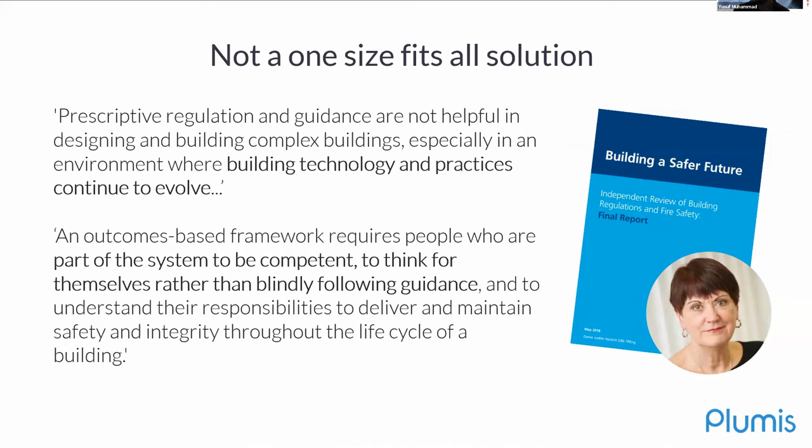She said that an outcome-based framework requires people to be competent and not follow guidance blindly, but think for themselves to maintain and deliver safe buildings throughout their life cycle. This is something that we at Plumis have really been trying to think about: how can we evolve the solutions to keep up to date with the way in which things are changing all the time?

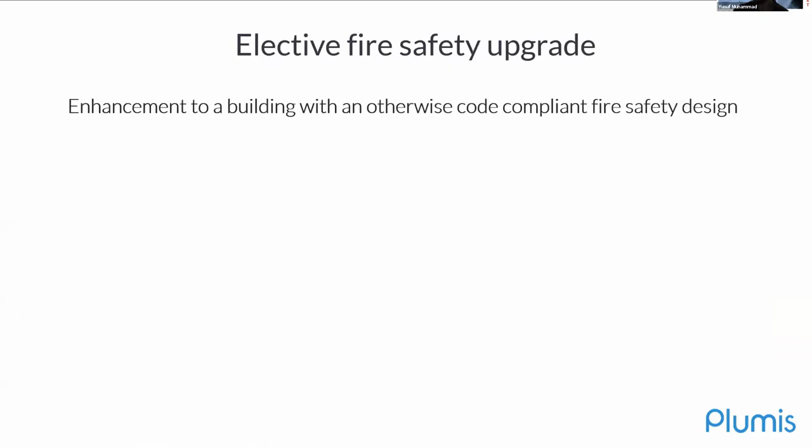So the very first thing that we do when we think about designing protection for a building is thinking about the factors involved. In the UK, elective fire safety upgrades fall under the Regulatory Reform Fire Safety Order. Codes and testing are obviously a key part of making sure that we can have solutions that are fit for purpose. This order puts responsibilities on individuals to carry out a risk assessment when they're introducing new things, and asks them to ensure due diligence is performed before they commission any device.

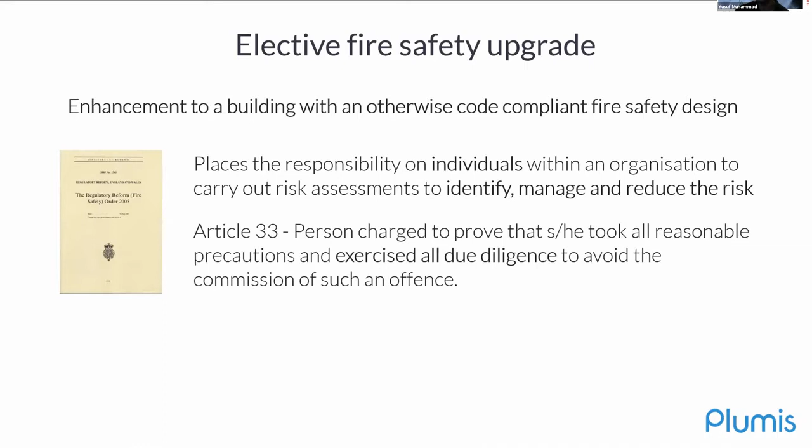So what does that mean? Well, that means that whenever a buyer, a customer, somebody protecting a building is considering improving their fire safety, they must consider a number of things. The first part is to define and understand the housing type and its characteristics. Are we looking for a solution for a flat? Are we looking for a solution for an individual building? What are the things we have to consider?

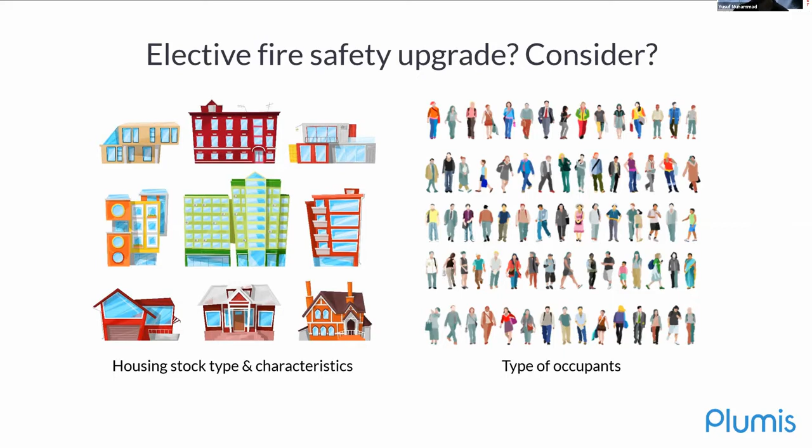The water supply, is a phased installation approach preferable, is there a high risk group that we would like to target? All of these things come into play. Secondly, and most importantly, what are the occupants who are living there, and how does this affect the fire safety strategy? How easily can we get individuals to buy in? Can they self-evacuate? Factors like tenability - how can we assess that the solutions we're providing are appropriate?

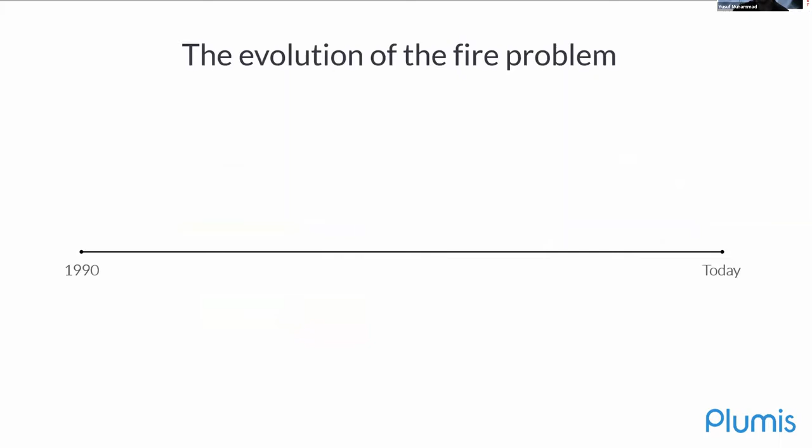Now I'd like to also talk a little bit about how fires have changed, focusing particularly on the UK. Since the 1990s, we've had the introduction of MMC, modern methods of construction, and this has had some implication on the types of fires that we see in our buildings. Hydrogen cyanide, for example, is 35 times more dangerous than carbon monoxide, and that is a result of, it's very well documented, some of the changes in materials that we use.

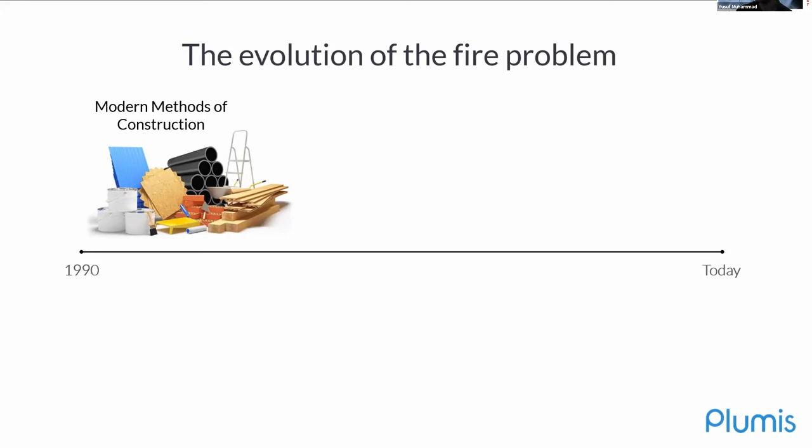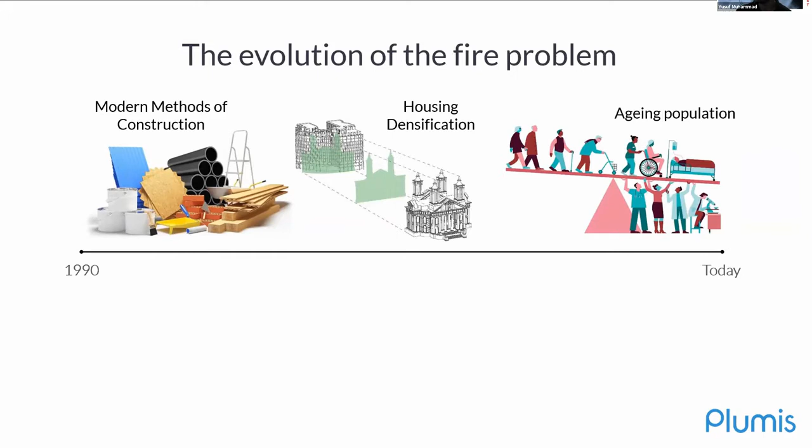We also see housing densification. The English Housing Survey quoted that overcrowding is one of the significant fire risks that they are concerned about. And in the vast majority of the developed world, we're also seeing aging populations, where those who are over the age of 65 are disproportionately likely to be affected negatively within a fire. So this is something that we need to think about.

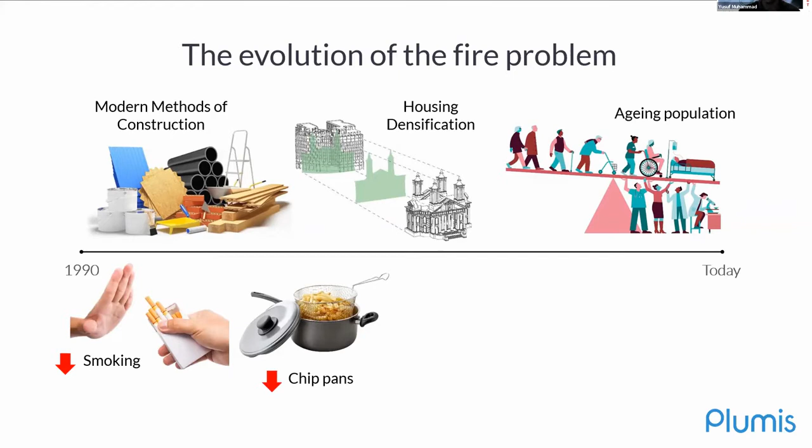Now, I'd also like to point to some of the factors regarding how fires start and how they are changing in recent years. We have seen a decrease in smoking-related fires and chip pan fires, particularly here in the UK, which has gone down from 20% to around 6%. And more recently, we are seeing an increased number in both electrical fires and white goods fires.

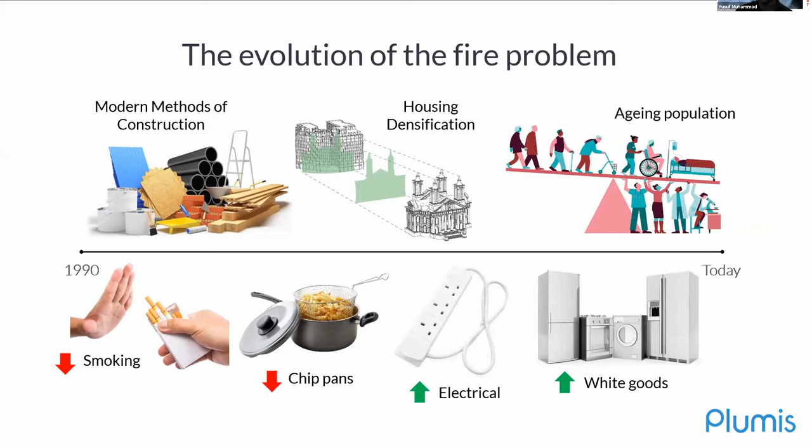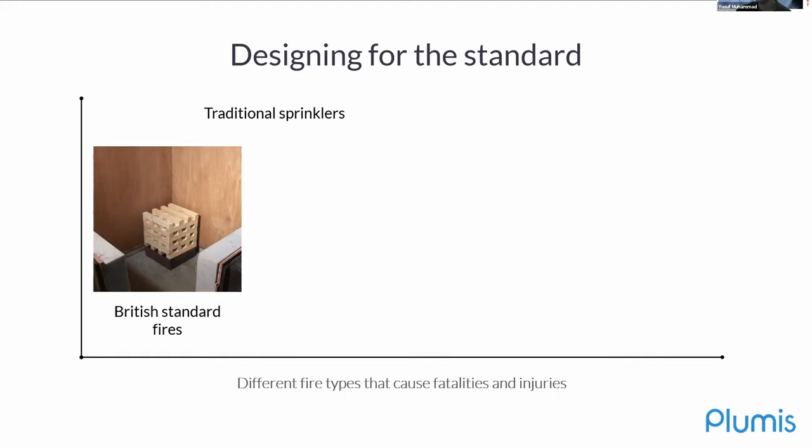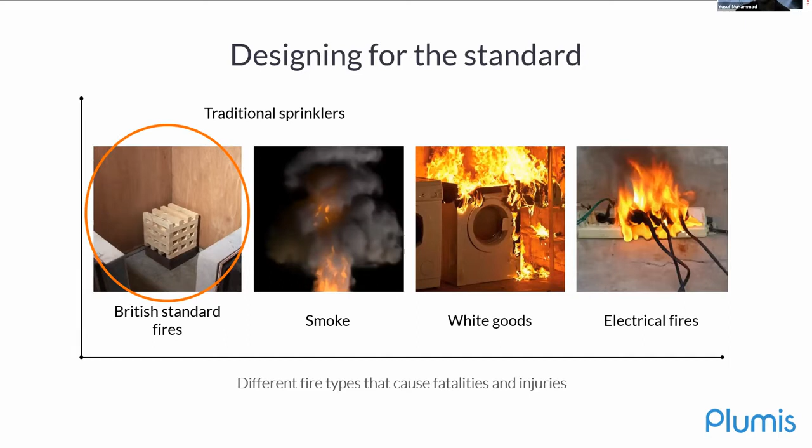So when we've been thinking about solutions, we're thinking about how we can provide the most appropriate thing. For us, this has meant not just focusing on designing for the standards, although they provide an important benchmark that any product being used for this needs to meet - it is not the only thing to consider. So we've also put targets on trying to address things like smoke and the types of fires that we see within a dwelling. This is something we've been doing as a company.

So when you put this change in the fire problem against the backdrop of how traditional sprinklers have evolved from when the first practical patent for a traditional sprinkler was produced - that was in 1882 by a man called Frederick Grinnell - you can see why there is a need for more types of solutions to address these problems. Traditional sprinklers fundamentally haven't changed a large amount, and I think that's in part due to the brilliance of the design and the standards framework that keeps them quite similar. But I think it also illustrates why it's so important that we have new types of technology.

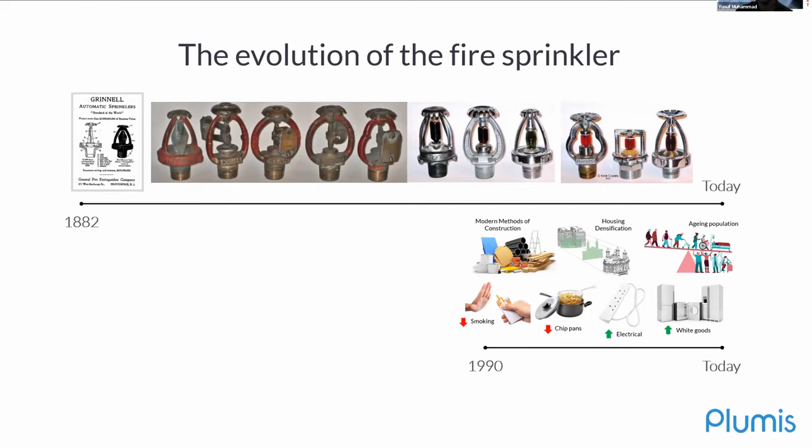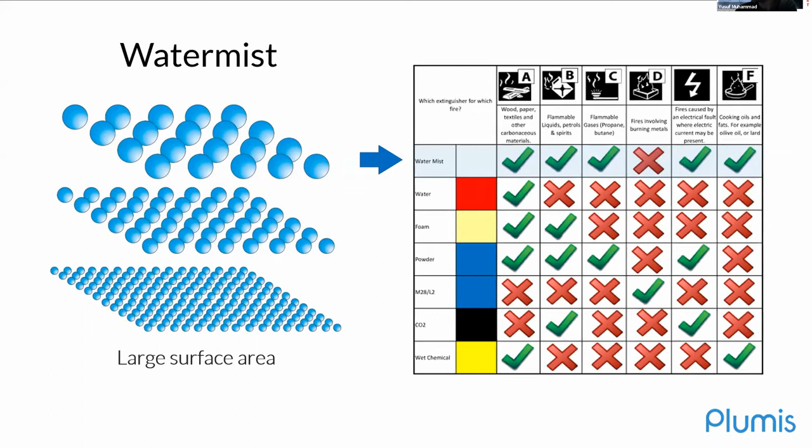And I think Watermist is a huge part of that. I won't go over this particular slide because Bettina already talked a little bit about this, but Watermist is really, really powerful because of its range of applications - whether it is a class A, B, C, E, or F fire, it can be effective in suppressing and extinguishing those different types. Now, one of the other points I'd like to highlight about the technology was told to us over 10 years ago by the former head of the International Watermist Association, Ragnar Wighus.

It's something that stayed with us in Plumis. He said to us, well, look, if you're going to be using Watermist, why not try and utilize the natural turbulence that the fire creates? So to explain this, in this chart you can see that a fire draws in oxygen across the floor, pushes out heat through its trunk, and that spreads out across the ceiling.

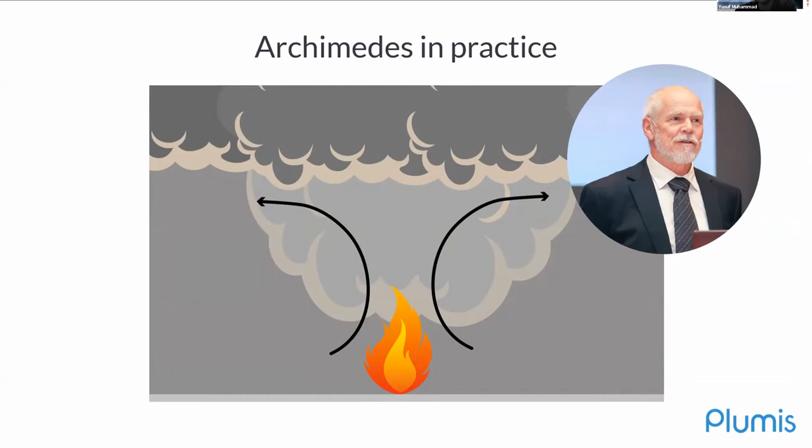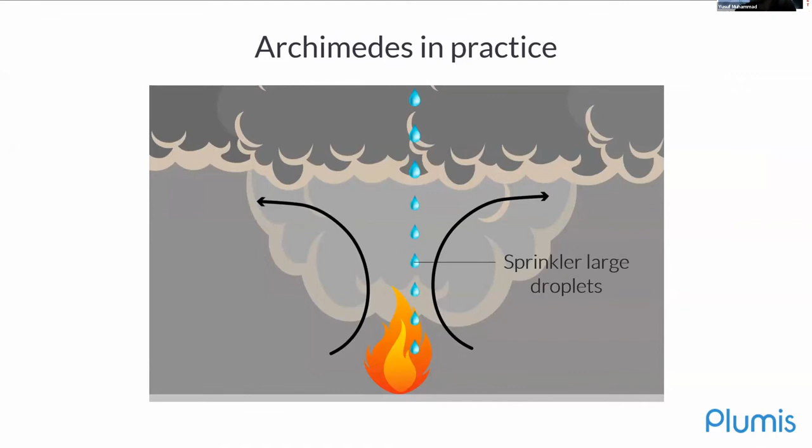Traditional sprinklers use large droplets, which go against this updraft. You have to have large droplets in order to break the up force that the fire creates.

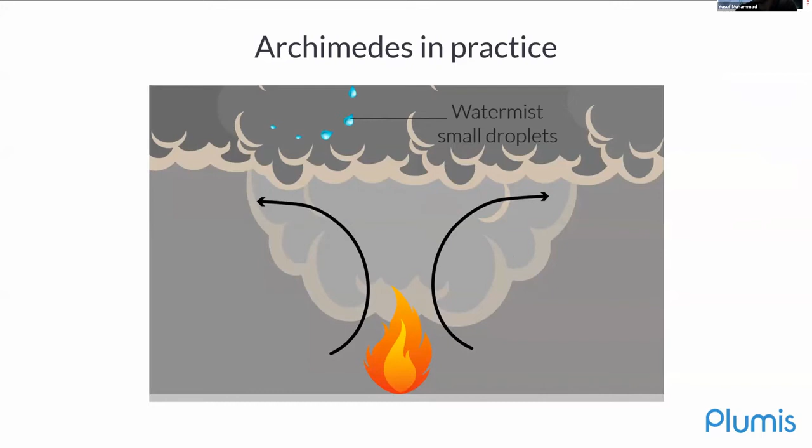The challenge with applying Watermist from the ceiling is that you have to use a bit more water because you have to cool the hot layer on the ceiling before you address the fire itself. So one of the things we're doing at Plumis, and some other manufacturers around the world, is mounting their nozzles lower because it's a more efficient way of addressing the fire, since your small droplets get entrained into the seat of the fire so you can address it more quickly.

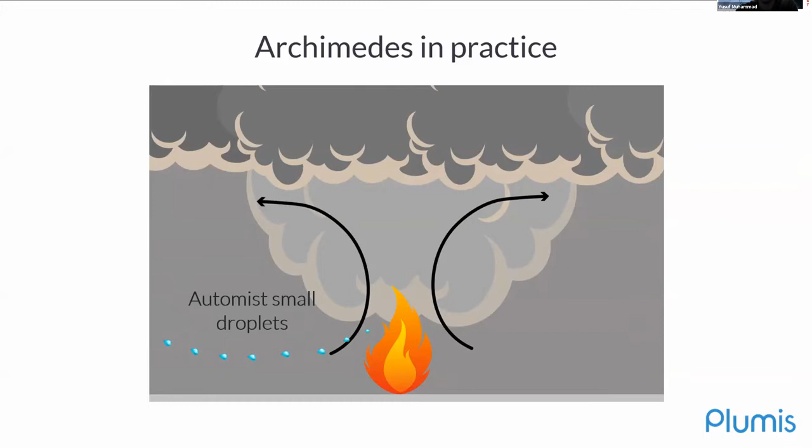The other thing we have also been looking at is activation, and how we can trigger our systems if we're going to mount them lower. For us, this has meant using infrared technology to identify the location. In the top right-hand corner of the screen you can see what's visible in a fire, and just below what it looks like to an infrared sensor or camera.

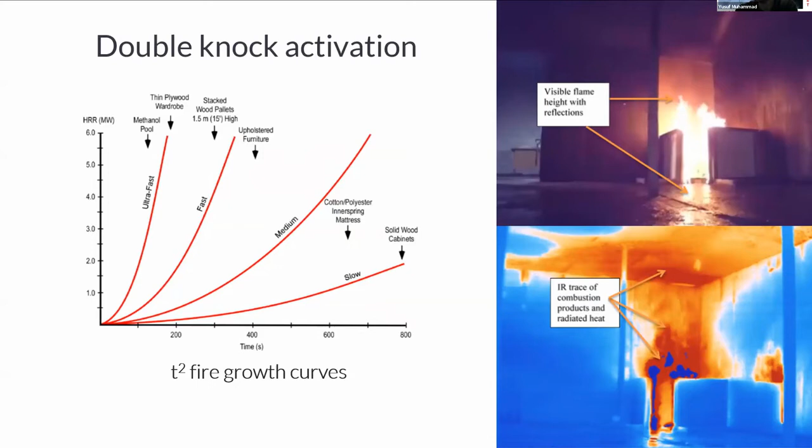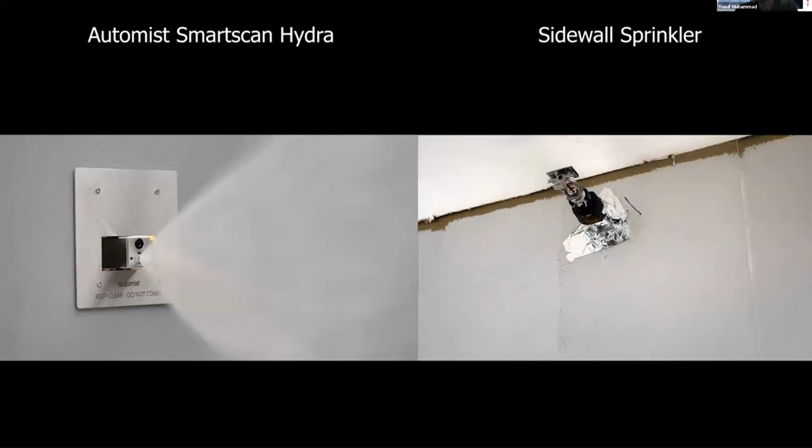Our system involves looking at how temperatures change within the room, using a methodology that a number of rate-of-rise detectors use, looking for change over time. This is applied with our unique nozzle head, which you can see on the left side of the screen. I'm going to show you a video where we've done a comparison of our technology.

You'll see it circled on the left side of the screen in a second, versus a ceiling mounted traditional sprinkler system. The first thing you'll notice is the system activates earlier. It does that because we're using our infrared technology to detect the fire.

You can see it there in the room on the right. It takes about 2 minutes later before the traditional sprinkler activates, and we're using significantly more water to extinguish the fire.

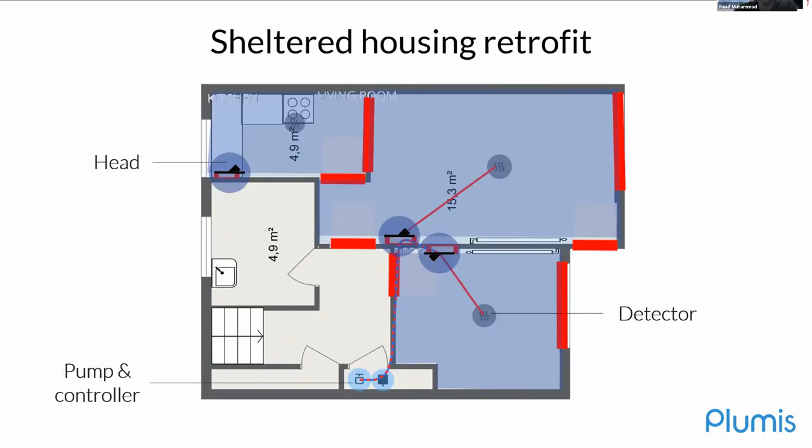Here is an example of a layout with the system installed. This was retrofit into a small flat housing vulnerable people. Our heads are mounted in the kitchen, the living room, and the bedroom. You can see what it looks like, and this layout was chosen to minimize the disruption to the occupant.

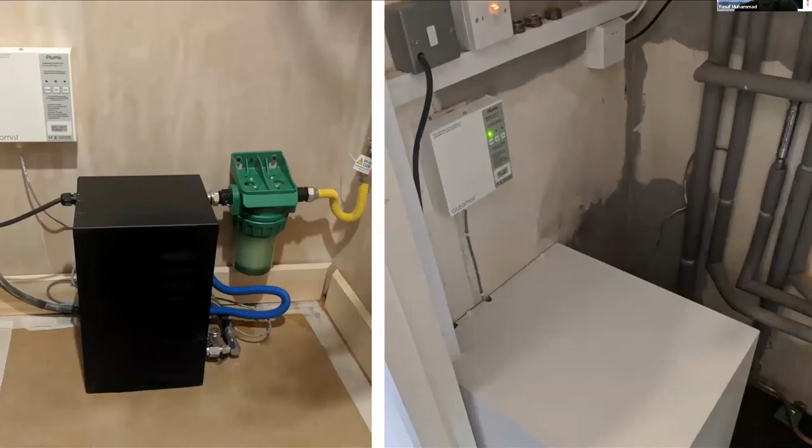The heads are wall mounted within the rooms, either in plasterboard on the left or trunking on the right, and the individual pump sets are discreetly put within a cupboard there.

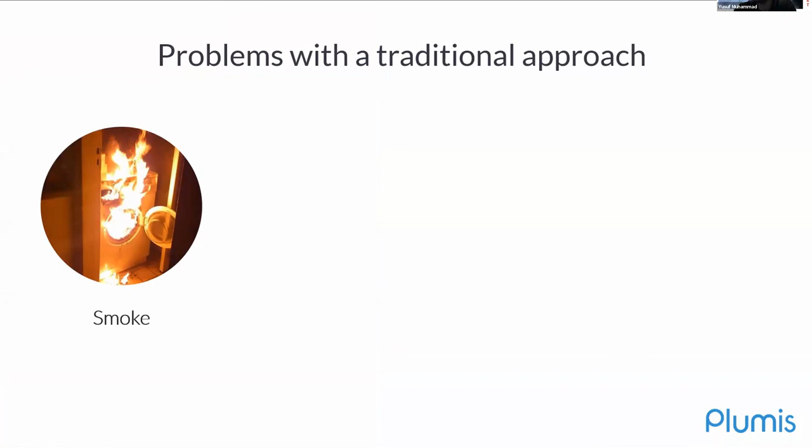Our approach is a little bit different, and it solves some problems associated with the traditional approach. The first one we look to address is the smoke. When a fire grows within a space, it changes temperature over time, and you're building up smoke throughout the duration of the test.

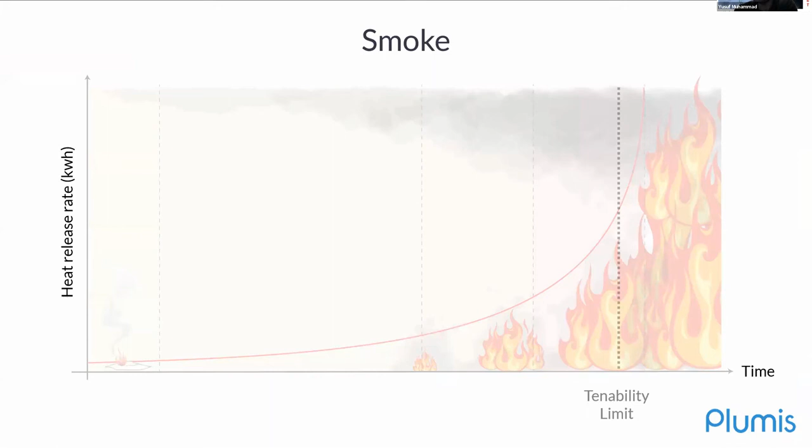What we're trying to do is make sure that everybody can escape within the available time. At one point the tenability limit will be breached, and the purpose of how a traditional sprinkler would work is, while there's a buildup of smoke, we're looking to address the fire before that tenability limit is breached.

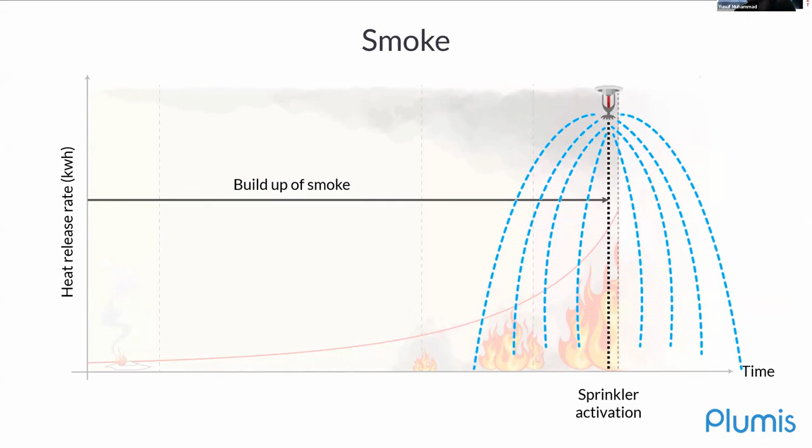One of the ways we act differently is we try to act at the earliest possible time. We do that by raising the alarm, with detection being a fundamental part of our system, and then, as you can see from the previous test, operating earlier.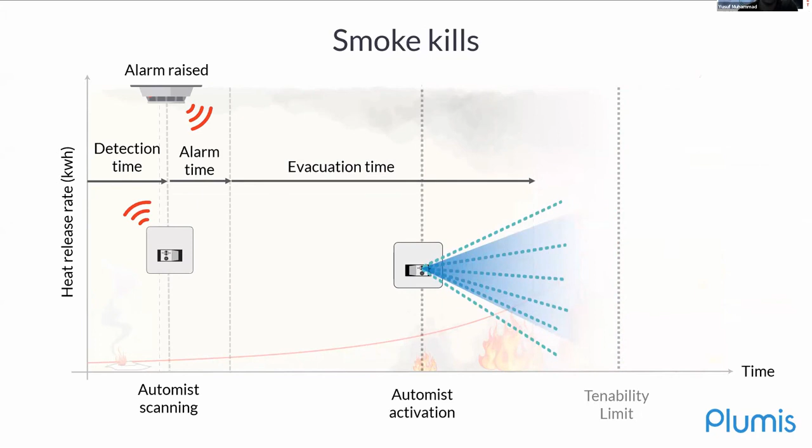One final thing I'd like to mention is that a key part of ensuring the performance of the system is capturing all of the information around the key elements of the components of the commissioning.

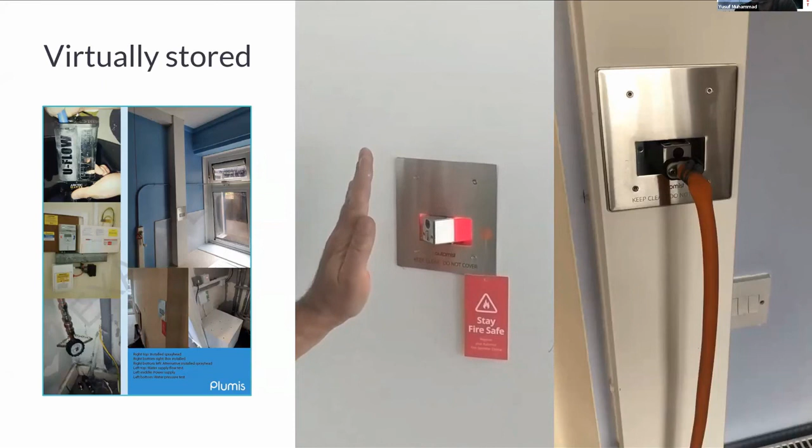That involves testing the individual heads within the space to ensure the sensors work, and running water through the heads and monitoring the pressure as part of the commissioning procedure, so that there is a record of validation. All of this information is stored digitally and handed over to the client, which again goes back to enabling the customer to do their due diligence and meet the requirements of the regulatory reform fire safety order.

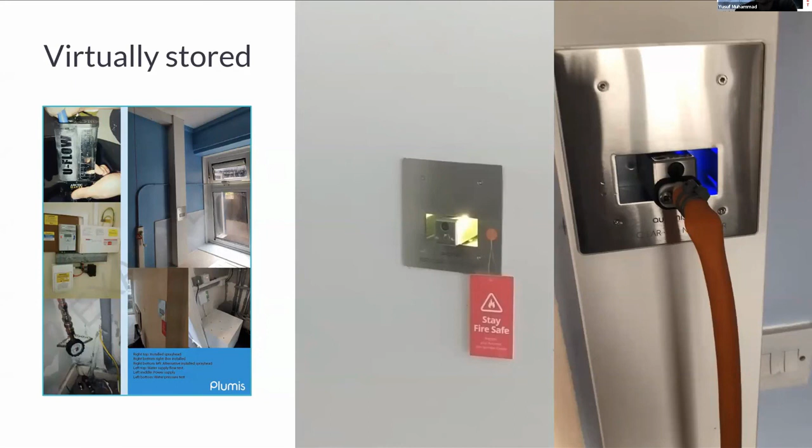So hopefully that gives you a sense of what we're doing, and explains this case study for Lambeth, which we are deploying as we speak.